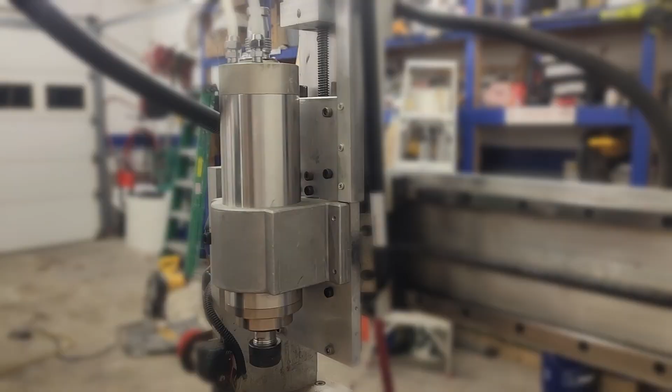Alright, so today I need to make a dust shoe for my new CNC spindle. So I thought while I was at it, I would just go ahead and record my process in Fusion 360 and make a little Fusion 360 tutorial for how I would go about this. Now let me just start by saying I'm not a Fusion 360 expert by any means, but I do make parts in it all the time and I'm pretty successful in getting what I want.

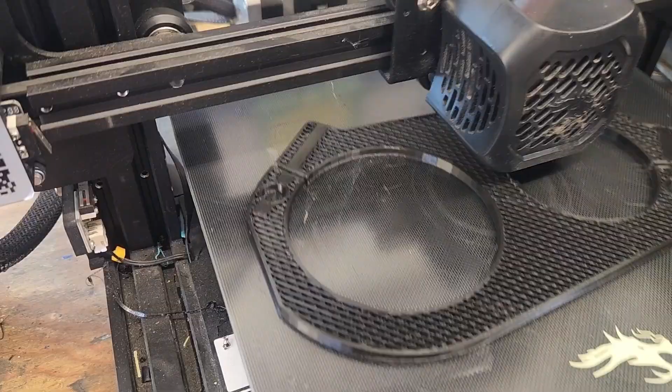So first thing that you have to do, if you've never used Fusion 360 before, is get it downloaded, get an account, free account for personal use set up, and open it up, and you'll end up here. From there, I have Untitled right here. One of the best things you can do is just go ahead and save that right away.

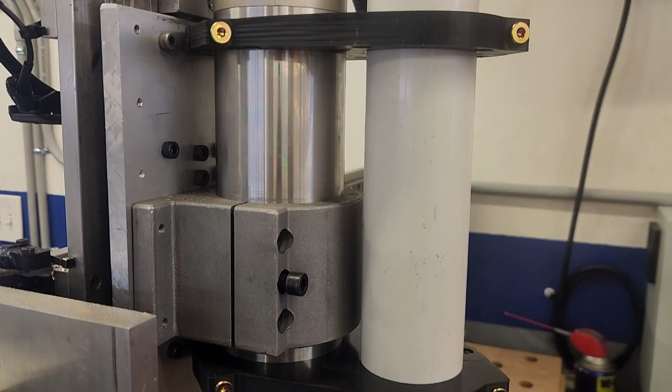My design I have in mind is actually 3 pieces. There's going to be a bracket on the top that goes to the top of the spindle. There's going to be a bracket on the bottom that's identical but has magnets in it to hold the actual dust shoe. And then there's going to be the dust shoe itself. So I'm going to do them in that order. So this will be dust shoe top. All right, and I'm going to save that.

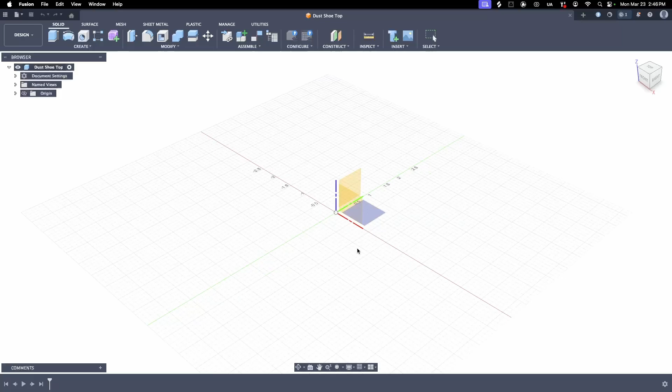So now what we need to do is start a sketch. So we'll go up to here to create sketch. And then we have to select a plane to work on. And I always select this one, which usually works right. You can see up here that the home is looking straight, the top is looking normal. This all looks normal to me.

So my spindle is an 80mm spindle. So I'm gonna come up here, grab the circle tool. You can also just hit C on your keyboard, and I'm gonna put it right there in the center, and I'm gonna drag it out. Oh, something else I gotta change real quick. So I'm gonna hit escape. I'm gonna come over here to document settings, and I'm gonna change this to millimeters by clicking on this, and then we'll change this to millimeters. I oftentimes work in inches, but for this 80mm spindle, this is going to be a lot easier.

So, all right, hit the C, make a circle, and then just draw it out, and then just go 80 and enter. That's all you got to do. I'm going to close this over here. We'll come back to that. We'll need that eventually, but I'll hit this hand. I'm just going to move this over here. I'm going to do another circle. So I'll hit C for circle.

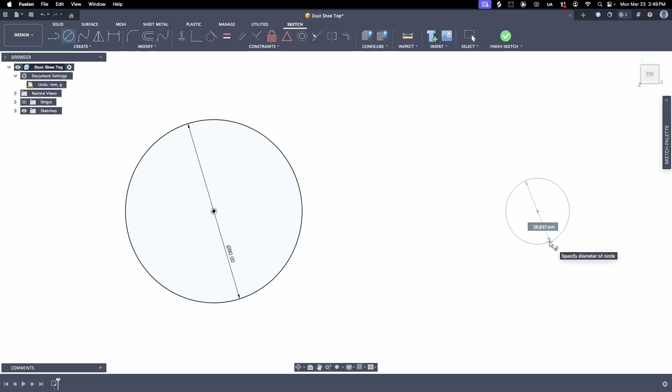This doesn't have to be exactly in line, but you can see that if you hit this thing and just kind of drag it, it will actually put it in line with the axis. If this is the x-axis, probably. It makes it parallel to the x-axis, right? Just kind of by default. So I'm going to click there and come out, and this one needs to be 61. And what this is for, this is going to hold the tube that's going to suck my dust up. And I'm going to actually just use a 2-inch PVC pipe. It measures out at 61mm. So that's what I'm going to use for that.

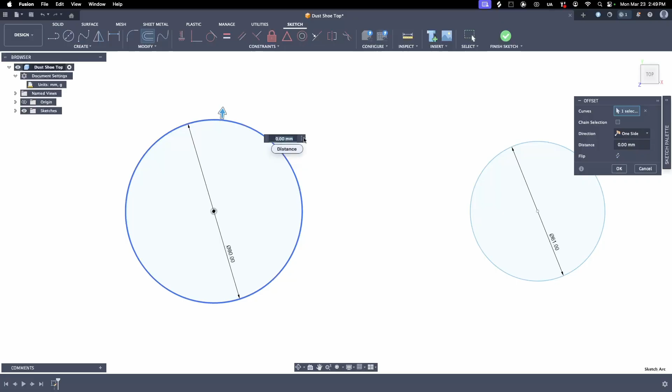Now, first thing I want to do is I'm going to take this, select this circle, and I'm going to offset it by 16mm. So you can just put in 16. So this will be where the spindle goes. This will be the outer part of the bracket when all is said and done. So I'm choosing 16mm as the basic overall thickness of the part itself.

It's basically going to consist of 2 holes, one for the tube, one for the spindle, with 16mm of meat around it that will house the brush at the bottom on the shoe. It'll house the magnets to hold the shoe to the bracket. So 16 is going to be the number I'm using.

What I want to do is move this circle right up as close to here as I can. Just move that right over here. And that's good. It doesn't have to be perfect. And then we're going to do the same here and do our 16mm offset.

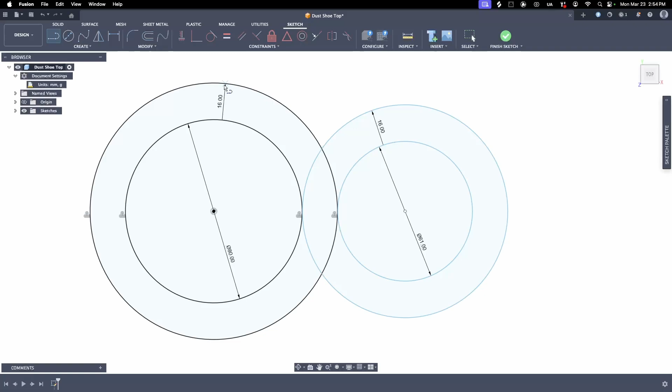And type in 16, enter. Okay. So now what we have is the 2 essential parts. And now we need to just connect them on the outside here. Now, I'm sure there's a way to do this more elegantly, but I basically just get there. And then if you kind of see how that changes to like a 0 right there, that seems to be like the point that you'd want to actually connect it to.

Because see, if you go beyond that, you can see it starts coming down. I'm following the circle, as you can see with the X and my cursor. But right there seems to be like the point, right? That is the, I'm sure there's a geometric term for it, apex of the circle or whatever. And I think we were on it. I think that was based on where I started from. Whoops. So I'm going to escape that because it's getting crazy. But see there, I got that line going.

I'm going to do the same thing over here. So I'm going to hit L for line. Use the keyboard commands. And look, it wants to go right to there. So, I mean, I can move it other places, but that 0 is what we're looking for. I think it's a tangent or something, right? So escape to get out of this thing.

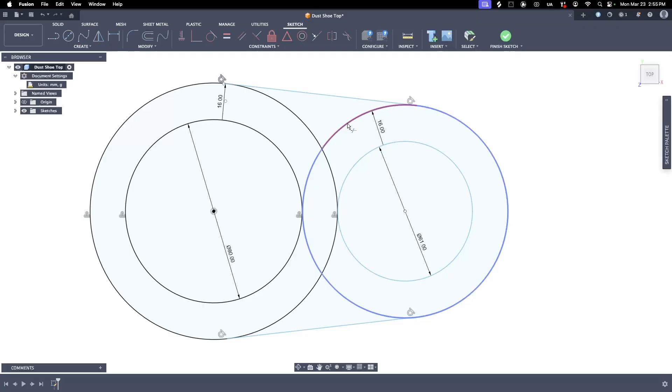Now I'm going to hit T for trim tool. And what I'm going to do is come in here. I want to get rid of this. And I want to get rid of this. And if you do something you didn't mean to do, you can Control Z and get your piece back, right? But I want to T trim that, T trim that, T trim this, and this, and this. So now we have the basic shape.

Okay, so eventually what's going to happen, again, this is the upper bracket we're designing here, but there's going to be some symmetry all the way down through. So what will end up happening is our brush will go right in here. Okay, so your spindle makes the chips here, and your vacuum sucks them up here, and then this brush contains it all, obviously. Anybody that's watching this for CNC purposes understands where we're headed. If you're watching for the Fusion portion of this, then that's what we're going for here with this.

So I think it auto saves, but I like to just hit Command S every once in a while, or File Save, just to make sure I got my changes saved. So now the next thing we need to do is we need to make a clamping mechanism to clamp this to the spindle, and to clamp this to the dust collection pipe. So I'm thinking about my machine. Oh, there's something else we need to do first. On my machine, the spindle bracket that holds the spindle in place bolts to a plate over here, and the distance from here to that plate is only 12 millimeters. So what I need to do is cut the end of this off to make it so it'll fit.

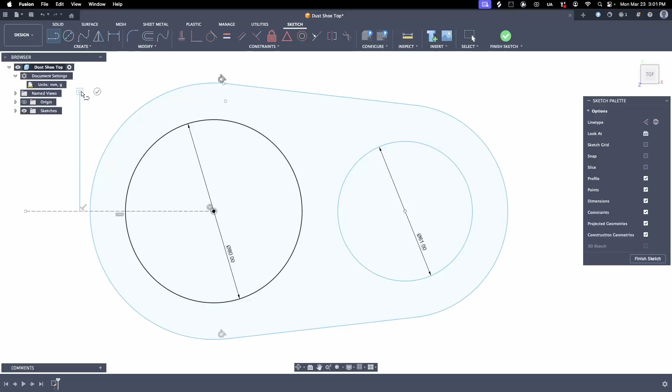And you see how it's giving me the right angle? And it says 90 degrees. So Fusion makes it so easy to do basic stuff like this. And I'm going to put it out here in left field just to show you, because I don't need to try and estimate where it's going to go. I can put it anywhere. I can put it here. The thing I really am looking for is for it to be perpendicular to the axis. I want it perpendicular to the circles, basically.

And I'm going to hit escape, and then we're going to hit D for dimension, and I'm going to go from this circle to this line. Okay. We are half of 80, so 40 plus 12 is 52.

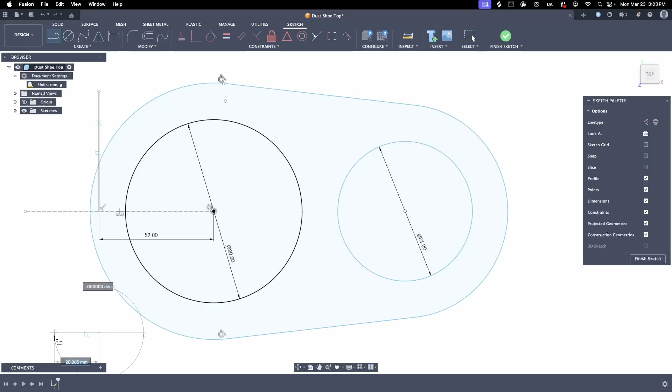So I type in 52, enter, and it puts that right where I want it. And okay, we're going to hit L. I'm just going to click on this line. I'm just going to draw it down so that it goes all the way through my part. Okay, now I essentially have two lines, but that doesn't matter. Like I said, we're going to delete some of this stuff here any second.

So now I'm going to press escape to get out of the line tool. I'm going to press T to get my trim tool, and I'm going to start deleting stuff I don't need. Okay, I don't need that line. I don't need this line. I don't need that line. I wonder if there's an extra one here. There probably is. All right, and this construction line.

Okay, so now this part will actually fit onto the machine and not interfere with the plate that's right here. Just to give you an idea of what we're doing, I'll hit R for rectangle. So on my machine is actually a plate that goes right there. So that's the issue that we're working around.

All right, so now that that's properly sized and everything, we need to make this so that these can be clamped. And I'm thinking about the layout. This is basically me standing at the machine. I'll be looking at it from here, looking this way. So when I want to operate this clamp, I'm right-handed, I'm probably going to want to grab that bolt and tighten it right here. I think I like it right here.

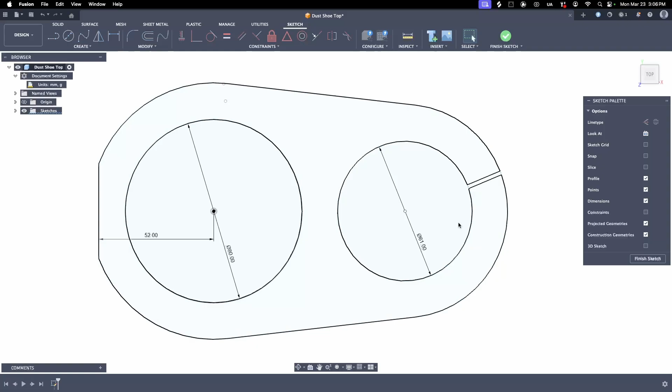Same thing with dimensions, once you start getting a lot of dimensions, because really in order to lock these things down, you need to dimension things out. See how this circle is blue? This one's black. This one's fixed to the point we started at. Let's just go ahead and I'll hit D and dimension this. See if we can make that turn black. And I'm just going to hit enter because it is what it is. And that did not make it turn black.

But I can make it turn black by making these two circles concentric. Did that do anything? No. How about just fix? There we go. That wasn't that hard. All right. I find Fusion 360 to be intuitive enough that with a few basic skills like you're seeing here, you can figure out a lot.

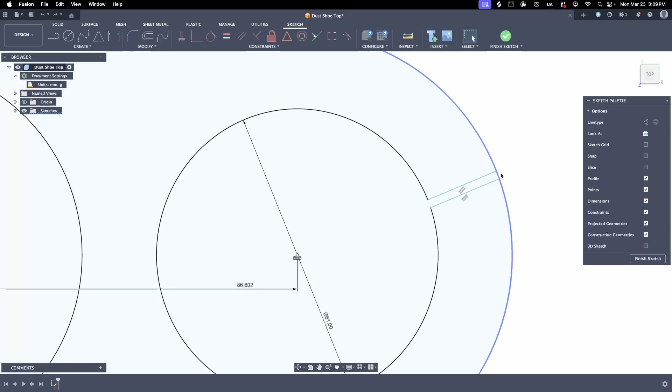So now this is going to get clamped. So what I want to do is hit my T tool, take out that little section and that little, whoops. Command Z. Sometimes you have to zoom in to get the little pieces. Not sure why that's not working. I must not be on trim tool. There we go. And I don't know how I got off the trim tool, but

what you can see now is we'll make a clamping force here. And how I'm going to do that is I'm going to run a bolt through. I've got some 10 millimeter barrel nuts. So I'm going to put a hole right here, and I'm going to go actually like 9.75. Actually like 9.75. And what I'm going to do is hit D for dimension, and I'm going to just go from there to there.

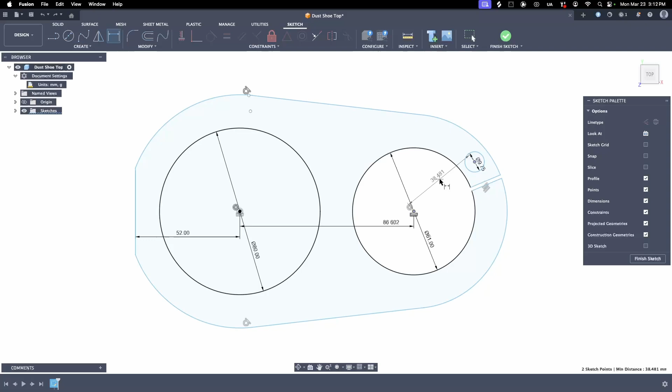38.5. There. Okay, now what I want to do is make a line from the center of this bolt, L for line, and we're going to come straight out here. I'm trying to think the best way of doing this, and honestly, if I go to the center point of that line, I'm just going to eyeball this, because this is just where I'm going to add meat where needed. So I'm actually going to favor it this way a little bit. Okay, and that's going to be a construction line. That's the path my bolt's going to take to get to this nut right there.

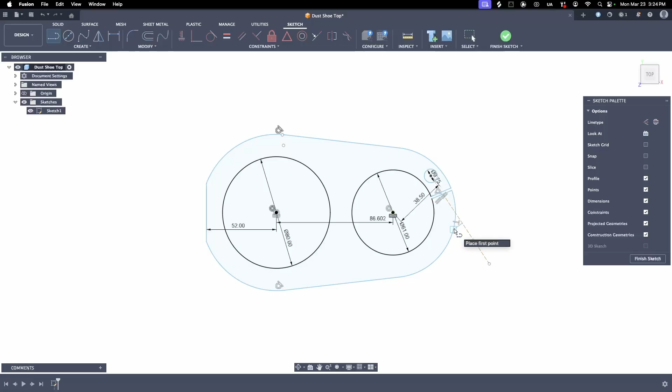So now what I need is a line that is perpendicular to that point of travel. And it says it's 14 millimeters right there. I think basically what I need is about 15 millimeters, but that's on both sides of the bolt. So I need like, let's go 7 or 8. I want it to be approximately 8. This is 8.52. All right, that's good. And now I'm going to click that, and I'm going to come through that. And this time I'm going to actually dimension this. So I want it to be 16.

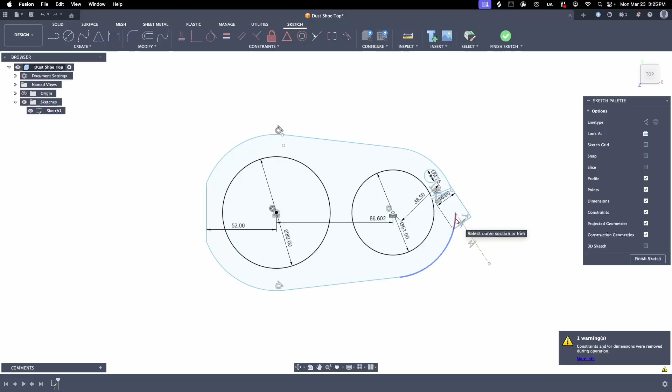And there we go. Then I'm going to come off of here with another line and just bring this to where it hits, which is right there. I'm going to get my trim tool out. Going to trim this out. Going to trim this out. I'm going to zoom in here. You know, I don't like that. I think I'd rather do this. I think I'd hit a line here. So a lot of this, I'm just designing as we go. So sorry about that.

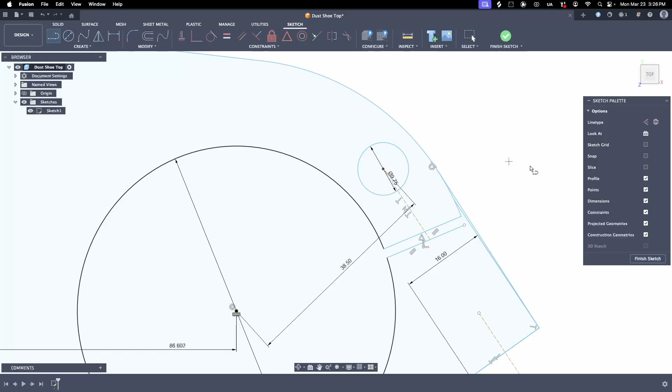But I want this to hit, I guess we want to hit, where's the highest? Like if you do this, it hits right there. So there, hits right there. There we go. That's what I want. So escape that. Now we got some cleanup to do here. I'm also going to do L for line. Continue this. Try and get it. It'll show you. It'll click where the actual parallel continuation of that segment is.

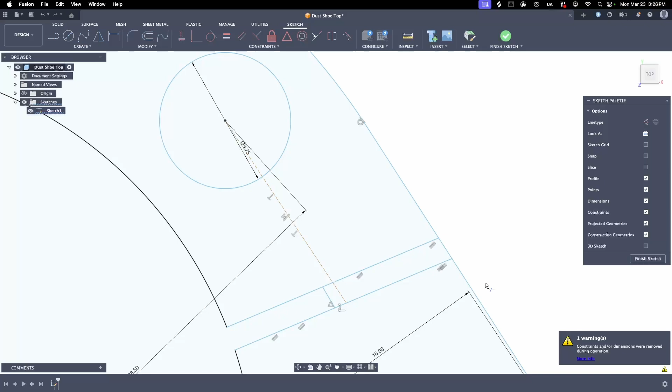Okay. Escape. T for trim. And get rid of this. And get rid of this. And get rid of that. Okay. Now see how all the constraints start getting kind of... Get rid of that. Oh, see, now I can see I had a line there. I don't even know where that came from. I need my trim tool, T. There we go. So that's looking a little better as far as that goes.

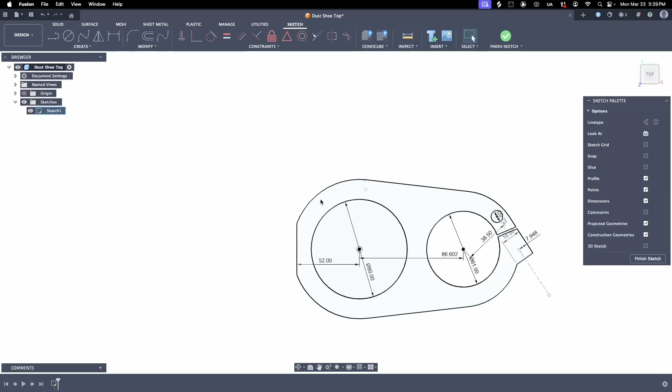I need a dimension of this, so I'll hit D for dimension. 7 point, okay. That's all I wanted. 7.95 is what we're going to use. So from the center line of this face, we need to be 7.948. And now we need to do the same for this. I just need to decide where we're going to clamp this thing. I think it's going to be right here.

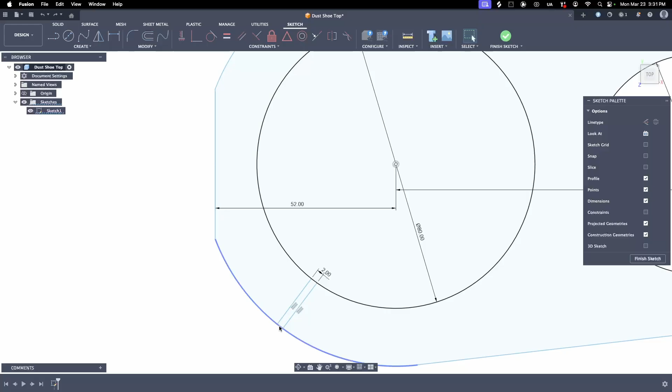So let's zoom in with my scroll wheel and hit L for line. And let's go right here, and go find that 16 millimeter mark. Wrong way. 16 right there. Oh, the other thing I needed to do, I don't know if I did this or not. Escape. I want 2 millimeters between these. So let's dimension there and there. Call that 2. I don't know if I did that on the other one. I'll have to see. Trim tool. That one. That one. That's what we like.

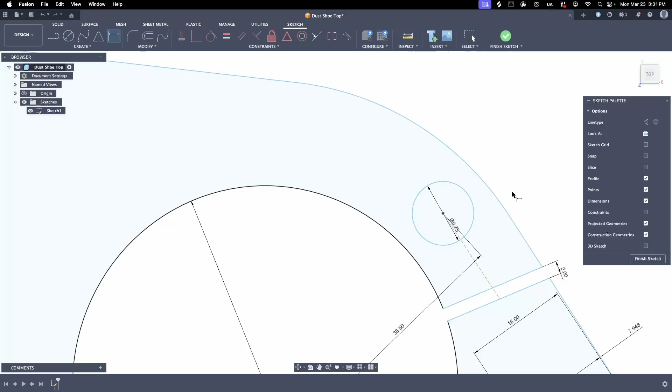2 millimeters. Whoa. And then over here, gonna dimension this to see where we're at. Oh, you never did do 2, did you? So now you gotta change that to 2. And that's amazing how it does that. Fusion 360 is awesome. It cleaned everything up for me automatically. So that was cool. All right. So now I got the proper clamping clearance.

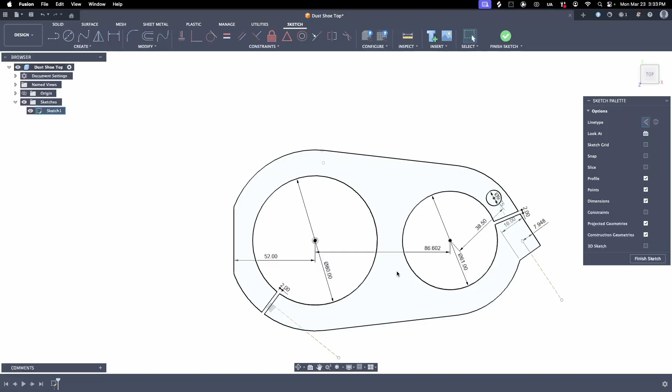So we're going to do the same thing. We're going to make a construction line. We're going to come into here, find the center point, which is right there, and just eyeball it out. Oh, yeah. But what I do need to do is get my circle. So circle, and a 9.75. Now, this line here, if we continue this line all the way through, see, that misses the center of that. Let's delete that.

I want to hit the center of that. So I'm just going to eyeball this as far as what looks right. I think that's too close to there. I think that's going to require me to add a lot of meat. So I'm going to go right there. I like that. Right there looks good. Escape. That was supposed to be a construction line. I don't know why it wasn't, but now it is. Make a line that's perpendicular from here. I want it to be about 16 millimeters, so I'm going to do the same thing I did. Bring that down until we hit around 8. That looks good.

That's perpendicular to that, and then we're going to do another line. It just continues that going forward, and that's going to be, this should be 8 exactly. I don't know what happened on the other side. If you look, you'll see, where's the fit? I like to hit fit once in a while. Okay. So now when we put in our bolt hole here, we know that that's exactly 8. This one ended up at 7.95. I could fix that, but I'm really not in the mood to.

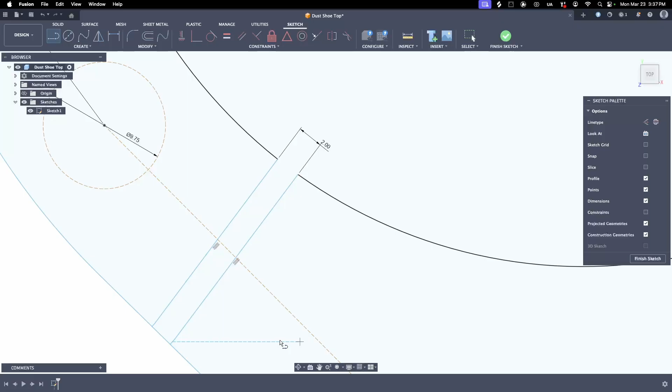I'm not sure that's straight. No, it's not. It's perpendicular to the... Oh, that's... Okay, that's fine. You know what? In real life, that's not going to make any difference at all. Get our trim tool. You know, I do want to fix it though. See how that's crooked? That needs to go away. And that needs to go away. And we need to draw a line that just continues straight. There. That's better.

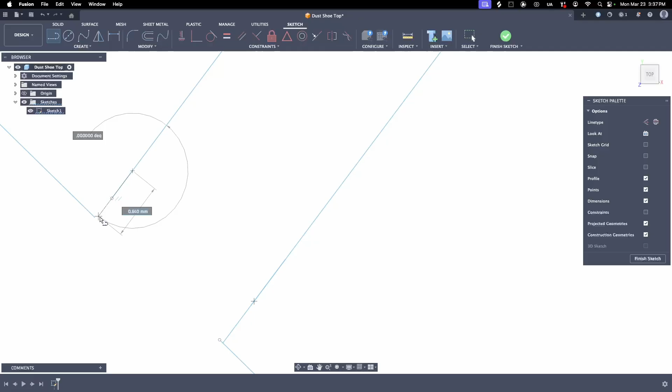I'm sure there's better ways of doing all this. Shouldn't have got rid of that. I guess I gotta fix that up. And remove this. There. That's better. I'm liking this. I think it's time to just put some fillets. And there's a tool, I'm sure there's a shortcut. All right. We're just going to use it right off the menu. There we go. And here.

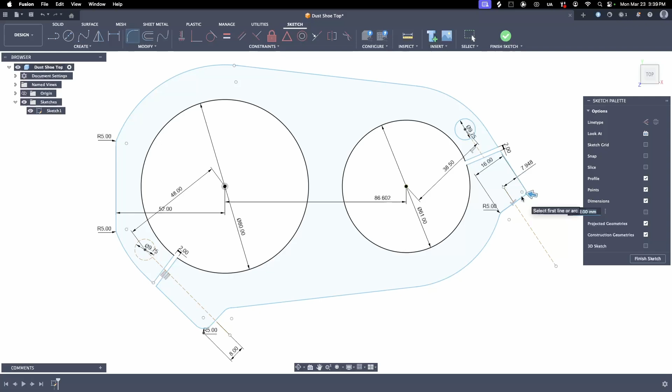And now it's... See, that's a 2mm. Let's change that to 5. 5's nice. All right. 5, 5. We'll do 5 over here. I like 5. Oh, it told me what it was. Yeah. Okay. And then 5. 5. The thing you got to be careful of is make sure my bolt head hits perpendicular meat. It should be fine. All right.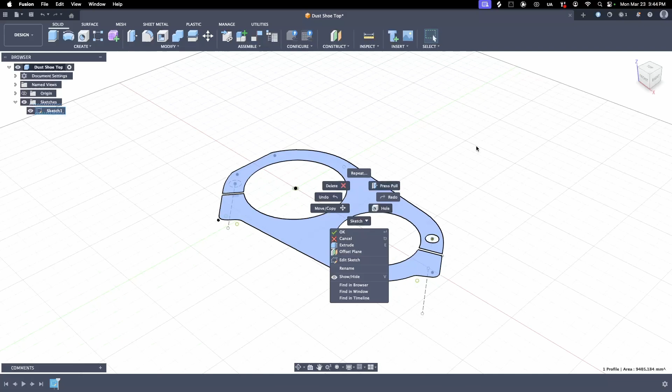Let's finish the sketch. I'm going to click on this plane right here, the part. See how the whole part lights up? And then you can either right click and hit extrude down here, or you can just hit the E, and then you can drag it up a certain amount, or you can type in a certain amount. I want 16. And then there's our part. Except for we're missing a hole. I gotta go back to...

So I'm gonna actually just delete that. So down here, you have everything we've done so far in order. So here's the sketch we made. Here's the extrusion we just did. I'm gonna delete this whole extrusion. Right click and delete. And then I'm gonna do this again. Okay, see how this hole is... We need to hit shift. Where's this hole? That's weird. I've never ever had this happen. Oh, that's a construction. Okay, we need to edit the sketch.

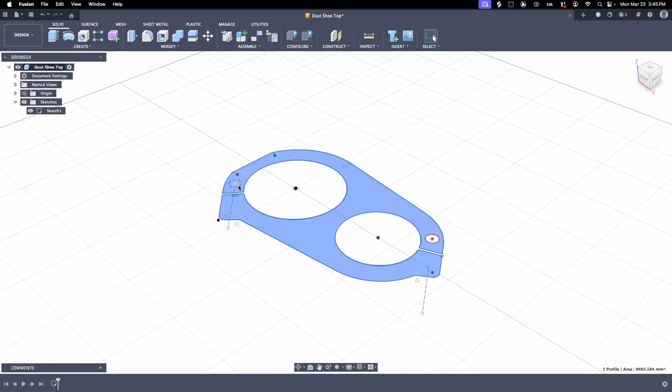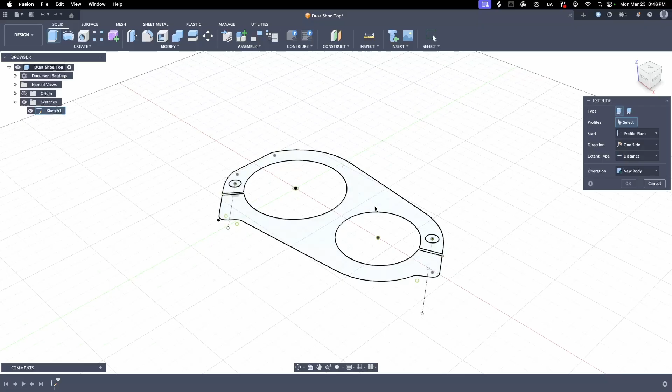Right click, edit sketch. Somehow I got my circle as a construction line, and I don't want it as construction line. Okay. Beautiful. All right. Now we'll save the sketch. That's the first time that's ever happened to me. So now we'll hit E for extrude. And we have to select right now. If you just hit E, it doesn't do anything. What it's telling you is you need to select the profile. So select the profile. Okay. And then you get your arrows and your box and all that. And I'm going to do 16. Enter. And there we have it.

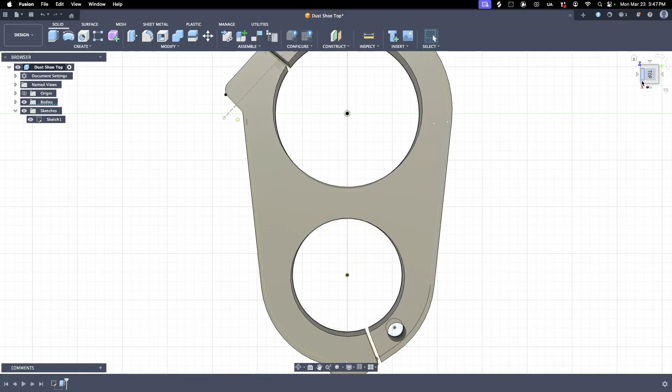So another thing too is if you get all discombobulated, just hit the home button up here and it'll kind of pull you back to where you started from. If you want to hit it straight on, hit top, and then you can also hit these things to rotate it around to where it should be. Okay, so get you back where you're oriented to.

But if you see these annoying things when you're looking at it, it's your sketch you're seeing, so shut the sketch off, and that goes away, and all you see is your part. Now for the top bracket, which is what we're doing. This is pretty much all I need, except we got to put in the bolt holes. So now we'll put in the bolt holes.

So what we got to do is create another sketch. I'm gonna turn this just a little bit because I want to operate on this face right here. There's a couple ways of doing it, but the way we've been doing it is create sketch, right? And then you got to select a plane, right? And before, when we had nothing, we selected one of these. This time, you can select any plane to create your sketch on. We're going to select this plane right here.

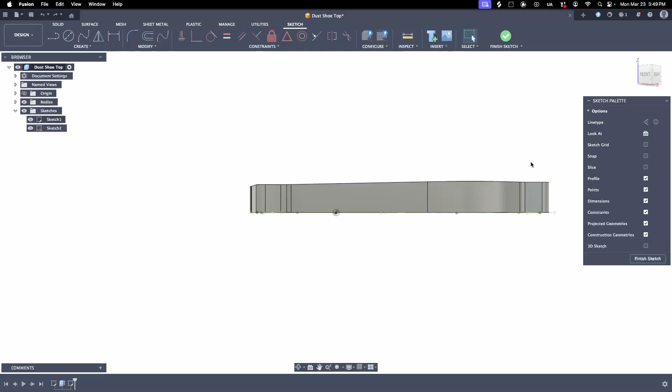And we are going to do a circle. I'm going to intentionally try and do it. It just wants to center it. That's just how awesome Fusion 360 is. But I'm going to intentionally try and make it off kilter so we can dimension it. You can see it move to where it should be. So I'm going to go 0.3 inches, which is 7.62 millimeters. So that gives me clearance for my 1/4 bolt.

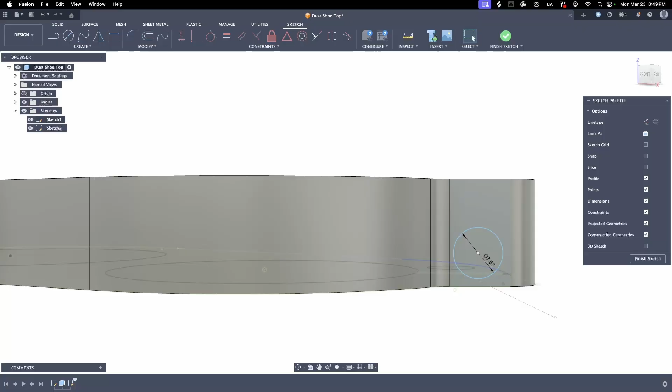Now, I gotta check and see which one this is. This is the one that's 7.95. Okay, so I'm going to dimension this from here to this face right here. Sometimes you got to turn your sketch a little bit. There we go. D to there, to there. 7.95. Well, I don't love that it gets into our fillet, so we're going to fix that after. And it's doing exactly what I want. It's putting my circle, my hole, in the middle of this bolt hole up here.

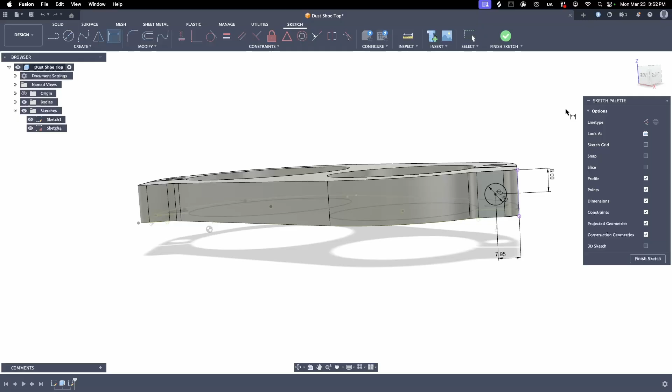Now I just need to dimension from here to the top, and that needs to be 8 millimeters. There. Now we're finished this part of the sketch, so we'll finish that. So what I want to do is select this and hit, oh, and you can see you got to hit that too. So hold shift and E for extrude. Now it says I got 2 selected. That's because the other part of that thing is running through the fillet. So the fillet kind of divided it up.

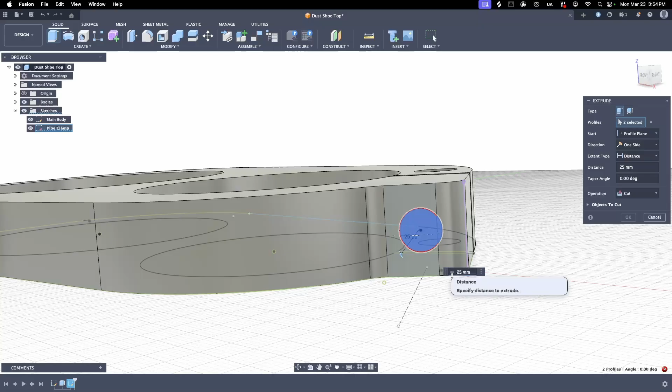And I don't know, I'm just going to go random 25 to see what that gives me. Enter. And it says no target body found to cut. So I need to go -25. So just put a negative sign in front of that. Okay, if you click on this extrusion over here down bottom, it'll show you how far I went. So 25 was that far. What I want to do is go just beyond. I don't want to poke out through.

I could go edit feature, right click and then edit feature. I could pull this thing all the way through. In fact, this is what I'm going to do. I'm just going to do it this way. Sometimes you want an exact amount, right? So you put the number in here. Sometimes you can just eyeball things and make it go a lot faster. Yeah, I think that's fine. That gives my bolt a little room to screw through there.

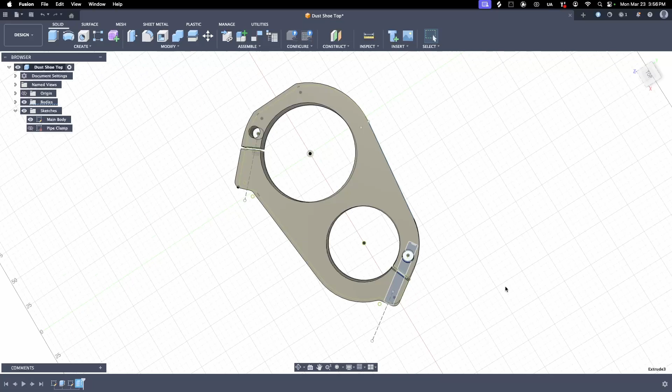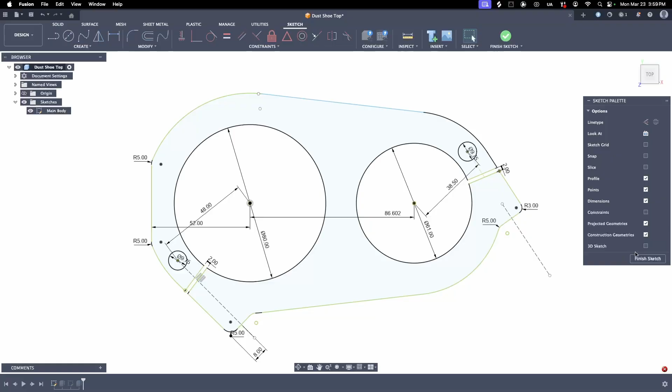The only thing I don't like right now is the head of the bolt is going to partially be resting on a curve, which I don't like. So I'm going to go back into the main body sketch where we put that fillet, and I'm going to edit sketch. I right clicked on the main body, hit edit sketch. I'm going to change this to 3 millimeters. Finish sketch. So now you can see that my bolt is fully resting on square parts.

I could have moved this whole edge out, made it a little beefier over here, but I don't think that's necessary. This is holding a PVC pipe. It's fine. It's not a big deal. Now we got to do this next one over here, and this one's probably going to have a worse issue, honestly. So we're going to create a new sketch. Create sketch on this plane.

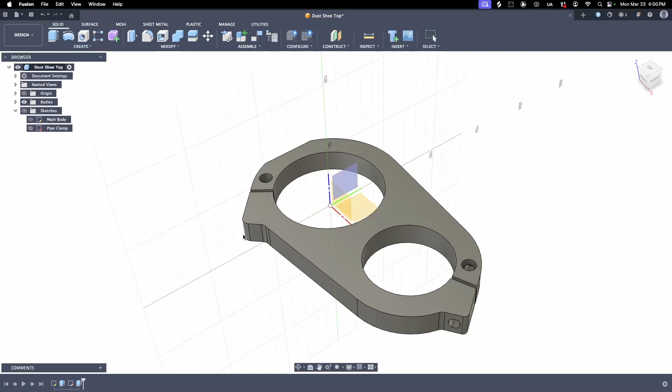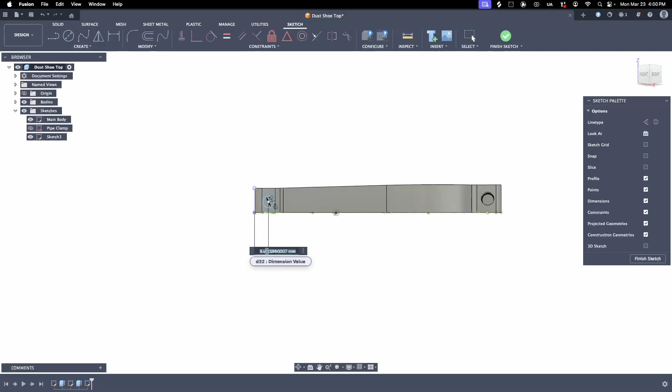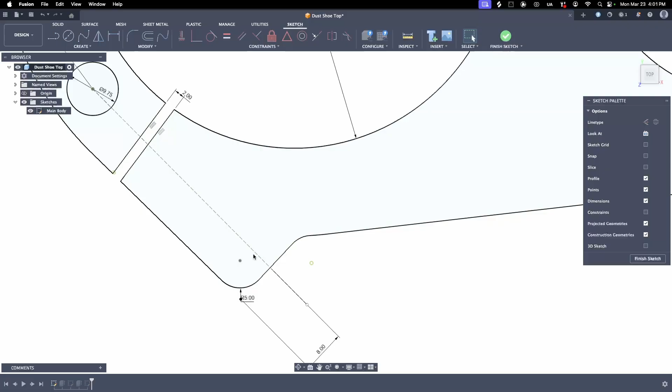And then turn the sketch on. And then we're going to extrude. See, that's going to be on that thing too. Let's see if we can fix that. So I'm going to edit the sketch of the main body. I want 3mm. There we go.

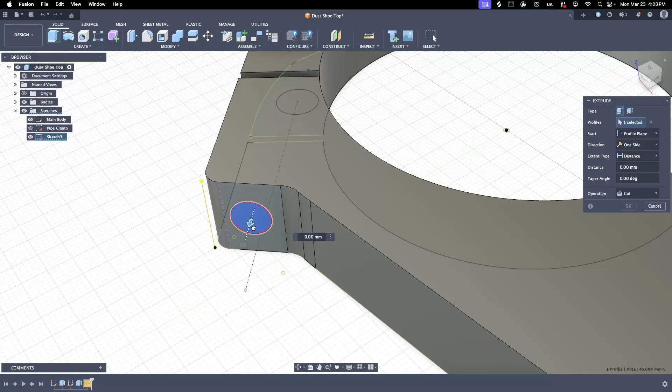So good, that gets it off the fillet. So now our bolt will bolt down squarely, supported all the way around. Hit that, hit extrude. Now, sometimes if you don't know whether you want to go negative or positive on your number, if you just move this out, you'll see that that's positive. So you actually want to go this way. You also see, if you look over here, that if I come out positive, it changes automatically to join. And if I go the other way with it, it'll change automatically to cut. So it's pretty smart. So I can just run that right through.

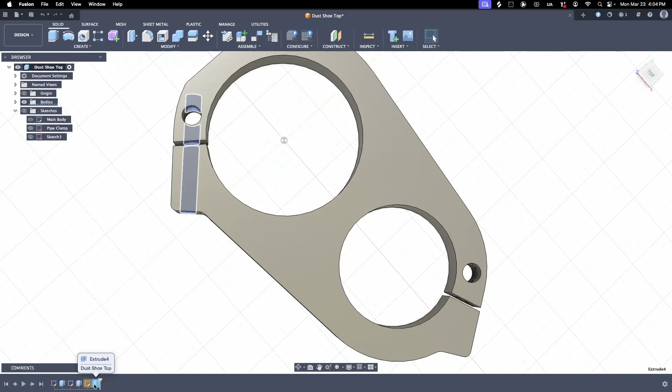Now that doesn't look like it hits it, but that's just because the sketch is skewed when it's in 3D. Okay. Turn that sketch off, make that thing go away. Now I'm going to flip it over. I want to see if I went all the way through. Nope, I didn't go all the way through. I'm going to hit that extrude down here. I'm going to highlight this extrusion to see how far I did go. So yeah, gave myself some room. That's probably plenty. So that's the top bracket.

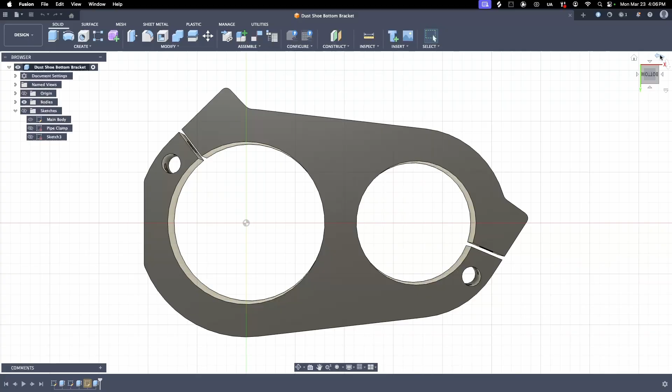To make the bottom bracket, what I'm going to do is just save as dust shoe bottom bracket. Okay, and hit enter. So now I'm working on the bottom one, and it's looking good. All I need to do to this one is to flip it over on the bottom. So I'll just flip it over until I see the bottom. You know, for some reason I just don't like the way that's, I feel like it should be this way. I'm going to create a sketch. And we are going to put in some magnets.

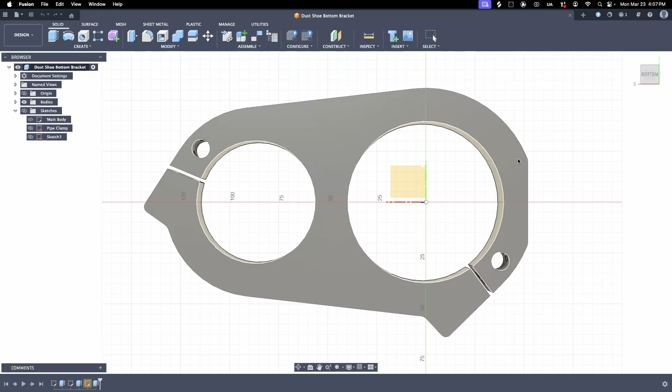So I have some constraints here as far as where I can put them. I don't necessarily want one in here. I don't want any in this section. So my first magnet is going to be here where it thickens out. So I'll hit circle and I will put one right here. Whoa. And these need to be 10.5. To me that looks, I mean, you can zoom on this, to me that looks evenly spaced. They don't really need to be dimensioned perfectly because the only thing they need to line up with is themselves, and I'm just going to use this as a template for the next part that they line up with, so it's going to be okay anyway.

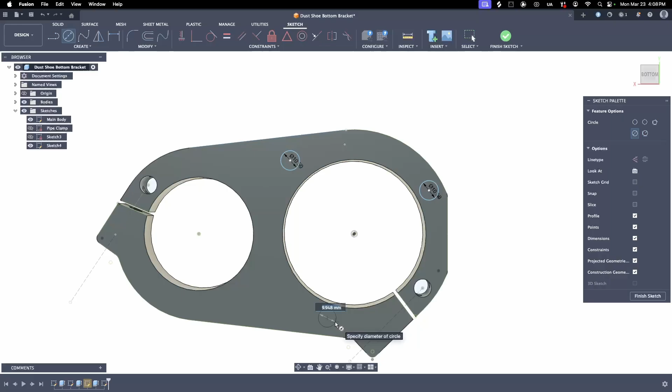I'm probably going to put one over here, which means a third one will go there. So let's just do it again. So circle, put one in here. I want 10.5, and then one over here. I don't know why that's blinking like that. I can shut the body off. That looks pretty good to me. That gives us 3 there. I think we're just going to put one here.

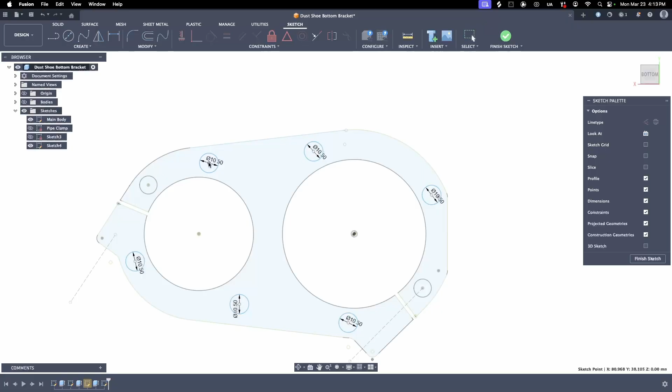10.5. Definitely want one here. Want one over here. I feel like this one could go over here. And that one could go over here. This one could probably go over here. 1, 2, 3, 4, 5, 6. That should be plenty of magnets. All right, I think I can live with that. So now we finish the sketch. Click on each item.

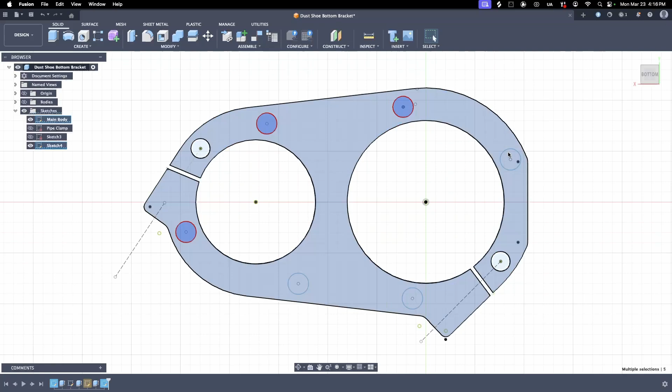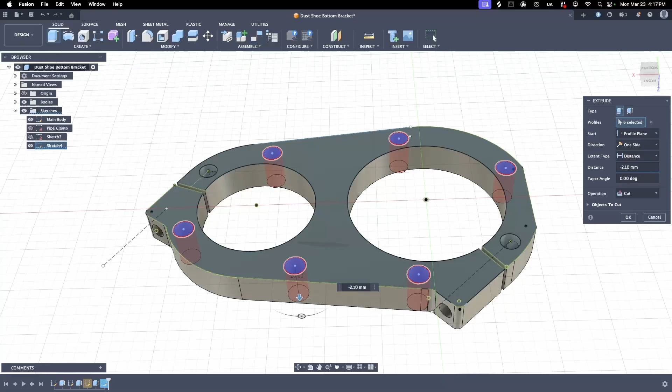You have to hit shift. I apologize, I don't know why that's flashing like that. There we go. Hit extrude. And if you tip it up, you should get the arrow things. There they are. So we want to go down because this is the bottom. If you put your body on, see, yep. So we want to go down 2 millimeters. 2.1. Okay, and there, now we've got, I'll shut the sketches off. I don't want to see those, just the part. There's the top. And there's the bottom.

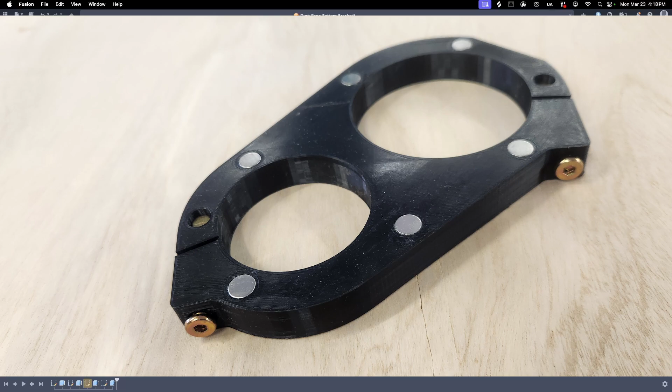So the first one we designed will be up here. The second one we designed will be down here, at the bottom of the spindle. The two of them together will hold the pipe straight. The magnets on the bottom one will hold the dust shoe, and that'll be awesome. So that's where this video is going to conclude. I may or may not make the video of designing the actual dust shoe, but it will start with saving this as the dust shoe and modifying it. So I'll be able to use all these geometries without reinventing the wheel.